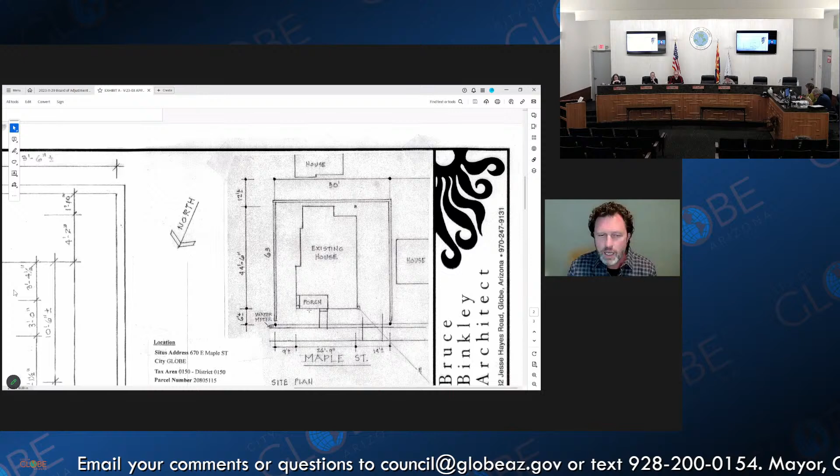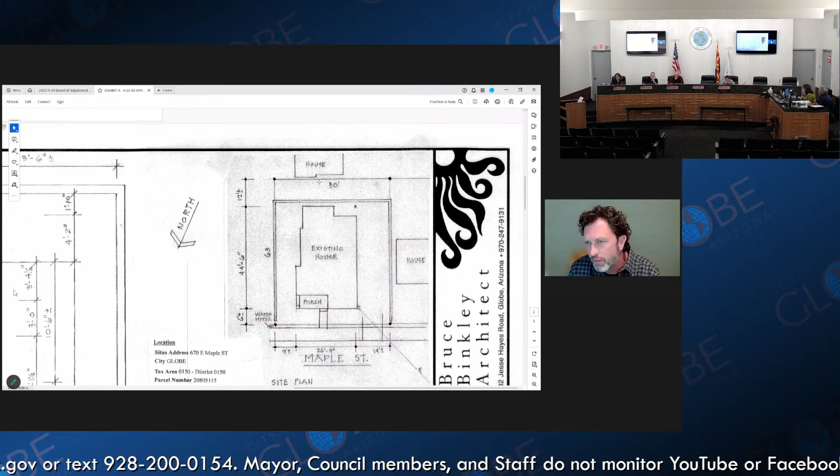Bruce Binkley, local architect, has drawn this sketch of the site plan. We do have a blow-up that's in your packet. I evaluated those setbacks relative to the county records, county GIS, and modified the criteria for where Bruce shows the 12-foot plus or minus setback here. It doesn't look like... it actually looks like the building is much closer to that rear property line, given that if we show a 6-foot out front, which I talked about that. So anyway, I modified that.

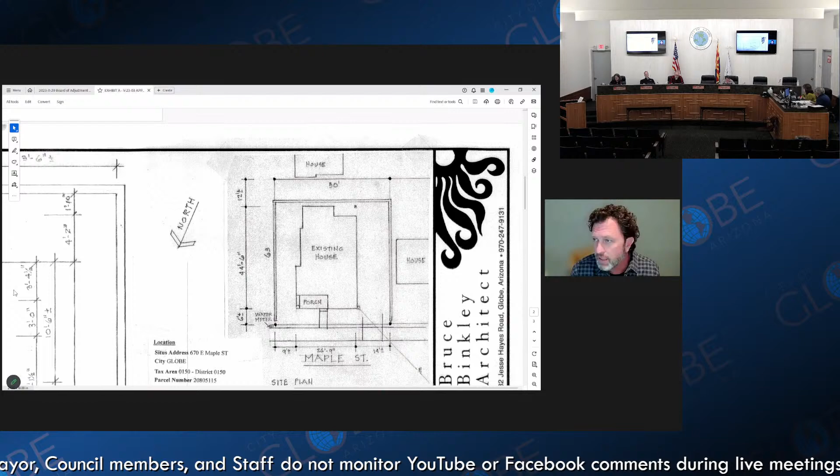Either way, we know it really doesn't have the same footprint as what's existing on site, and that's what the applicant's proposing for the variance, which would be 3 items.

My apologies. Reduce that front yard setback from 20 feet to about 7 feet. Reduce the street side yard building setback from 20 feet to about 8.5 or 8.75 feet. And then that rear setback, I think, is actually closer to 8 feet rather than 12 feet.

So we have, or as I know, on item number 3, as currently exists, the legal non-conforming structure. So we just want it right back in that place.

We recognize this area of town is generally historic, and there's a character to that we all appreciate. That makes it very unique, particularly in this area close to downtown. So reducing these setbacks to what was built historically will preserve the walkable streetscape, which is very much valued in the city, maintaining that historical character with buildings closer to the street and parking in that situation.

So anyway, you can see in my staff report how I made the 4 findings. With that, staff is recommending approval with 3 conditions.

We want to make sure when they're all done that the frontage sidewalk fronting the property, which is every property owner's responsibility to maintain in the city, is repaired so it's a nice new surface, since it's sometimes really damaged during construction when bringing in heavy equipment and loaded trusses and things like that.

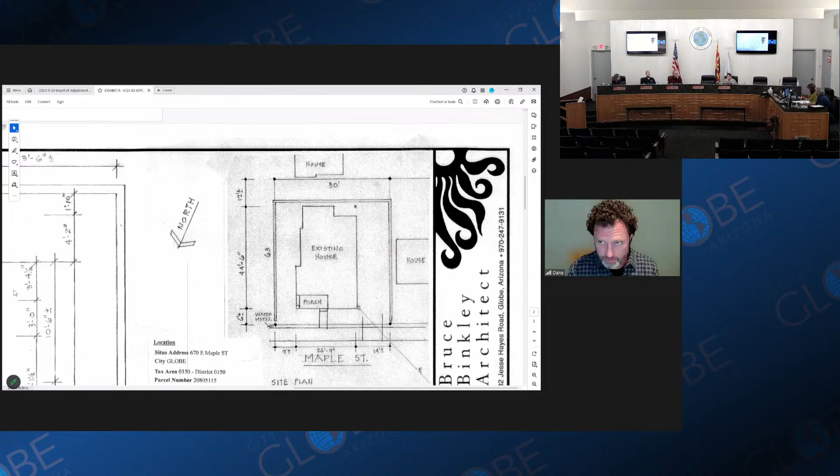I would like to open up the public hearing for consideration of variances to reduce the required minimum setback for a new single-family home located at 670 East Maple Street, case number V-23-03. Is there any discussion?

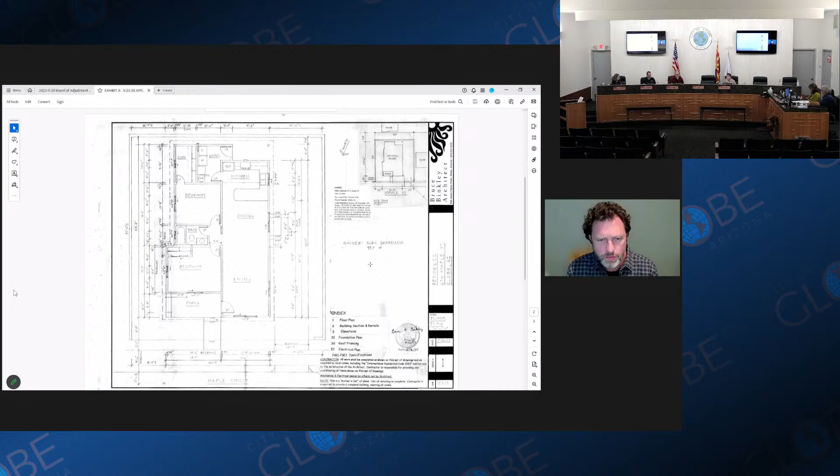With that, would you like to take a vote? All those in favor of approving this? Oh, you can close the public— I gotta close the public hearing. Okay, and close the public meeting? Yeah, close the previous public meeting, open up the public hearing. Now you'll close the public hearing if there's no public comment available. Public not available, so I'll close the public hearing. Go back—welcome to make a motion.

I make a motion to approve. I'll second the motion to approve the variance. Okay, all those in favor? Aye. All those opposed?

The motion to approve the variance for the required minimum setback for the family home located at 670 East Maple Street has been approved.

Okay, ready? The next item on the agenda: public hearing and consideration of variances to reduce the required minimum setback to allow a substantial remodel of an existing single-family home located at 655 South Third Street, AKA APN 208-05-270, case number V-23-04. Perfect, thank you very much.

We have this site plan, looking at the photograph the applicant had originally submitted. I know they've done some work on this home previously when we went to the location of the property, which exists in a very unique situation—hopefully unique just to these few properties.

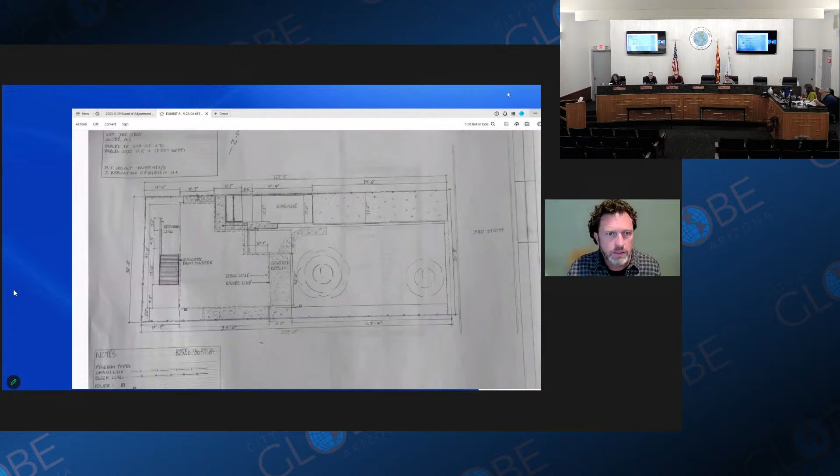Other than that, it's all existing — the garage is existing, sitting right on the property line. This particular variance is requesting a rear and side setback to accommodate the development, and they're listed there in the staff report.

Conditions of approval: staff is recommending to receive a full width and depth alley abandonment from the city prior to receiving a permit to construct. That's going to be contingent on other property owners, but we'd like to get this out of the way — by no means will we issue a permit until that's no longer city property. Reconstruct all portions of the sidewalk fronting this, just like the last ordinance.

We want to make sure that sidewalk is done after construction and is walkable. So with that, staff is recommending approval of these variances. I'd be happy to respond to any questions.

After you're done discussing, you would open up public hearings, see if anybody's available in the audience or online to comment, and if not, close it and move forward.

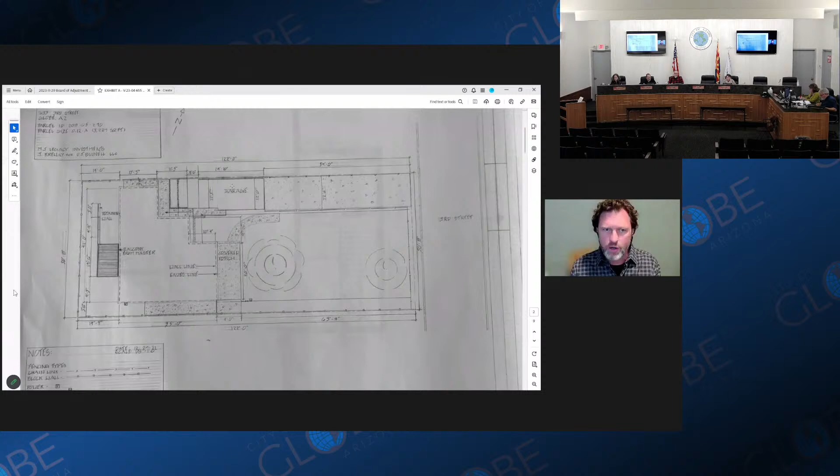Correct, fire is part of the review process. Access would be through here, right? Or it would be more difficult on the side where the garage is. But they did not have concern. Fire takes a different approach with single family homes, and the only regulation I'm aware of is to not allow air conditioning condensers to be located where you'd step over them — but as long as they have some form of access to get back to the home, they have not had an issue.

And it's all existing, by the way.

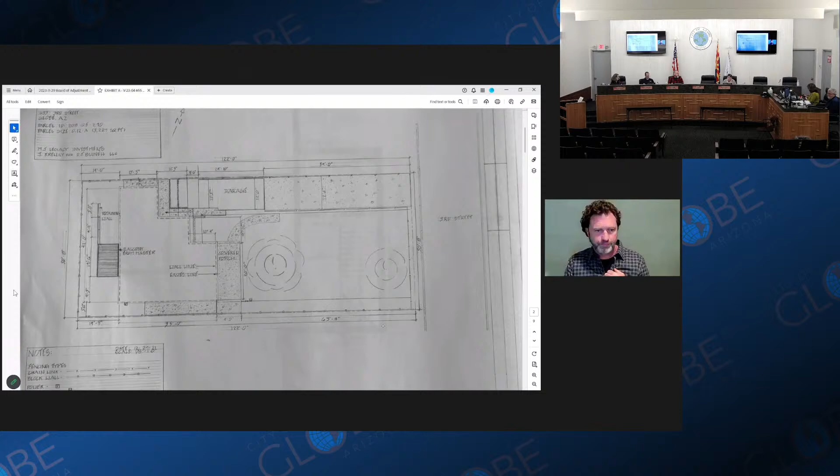Any further discussion? We'll close this portion of the meeting and open up the public hearing to consider the variance to reduce the required minimum setback to allow a substantial remodel of an existing single family home located at 655 South 3rd Street. Anybody? No? Since there's no public input, we'll close this public hearing.

All those in favor of approving the variance to reduce the required minimum setback to allow a substantial remodel of an existing family home located at 655 South 3rd Street? Do I have to read all the numbers? Do I call for it? I have a motion to approve the variance. Motion to approve. Second. All those in favor? All those opposed? The variance to reduce the required minimum setback to allow a substantial remodel of an existing single-family home located at 655 South 3rd Street has been approved.

And the meeting is adjourned.

Good job. There you go. I think so. Yep. Wow, it's a record. Did that meeting happen? Yeah.